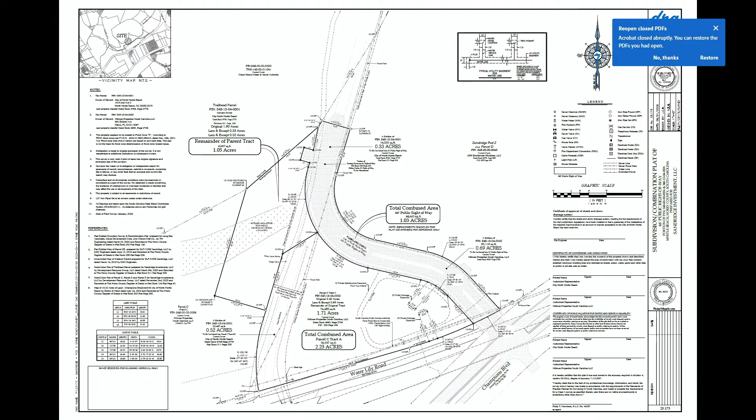Item 5A is SUB 2546, a final plat for the Sandridge Spine Road. The preliminary plat was approved September 19th of 2024. Total area of the subdivision is 3.24 acres, one lot of record zoned R2A currently. This plat creates Parkland Drive, a 66-foot wide public right-of-way designed to meet city standards, including requiring sidewalks and street trees according to the LDRs. There is no financial guarantee with this plat because Public Works has accepted the closeout documentation, the recorded road and drainage record drawings, and everything has been installed. Staff has no issues with the plat.

Is there any discussion by the commissioners? Any comments from the public? Okay, then I'll entertain a motion. Mr. Chairman, I move that the Planning Commission adopt the staff report and approve the major unbonded final plat of subdivision SUB 25-46 prepared for Sandridge Spine Road as submitted. Second. First and second, any final comments? All right, all those in favor? Aye. Opposed? Ayes have it.

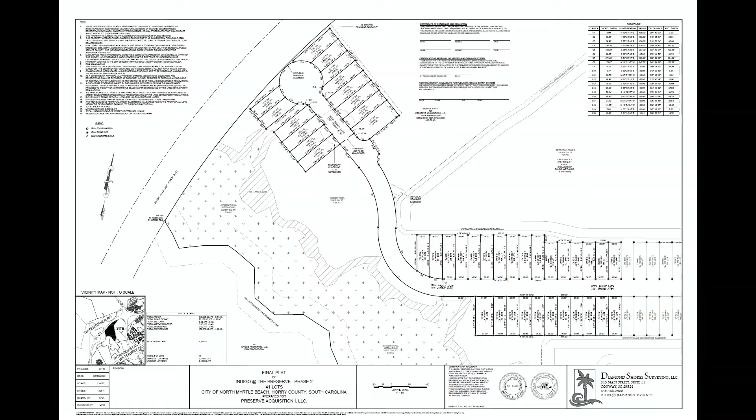Item 5B on the consent agenda, pulled off, SUB 2627, creating 41 residential lots and rights-of-way in Phase 2A of Indigo at the Preserve. This preliminary plat was approved June 18th of 2024. Total area of the subdivision is 5.74 acres, zoned PDD. Infrastructure is currently under construction. The smallest lot is 3,719 square feet and the largest is 7,188, with a density of 7.14. This plat continues Blue Heron Lane, a 50-foot public right-of-way. Everything is according to the approved preliminary plat and PDD, and they are providing a subdivision bond for $332,077 for this plat. There's no comments from staff.

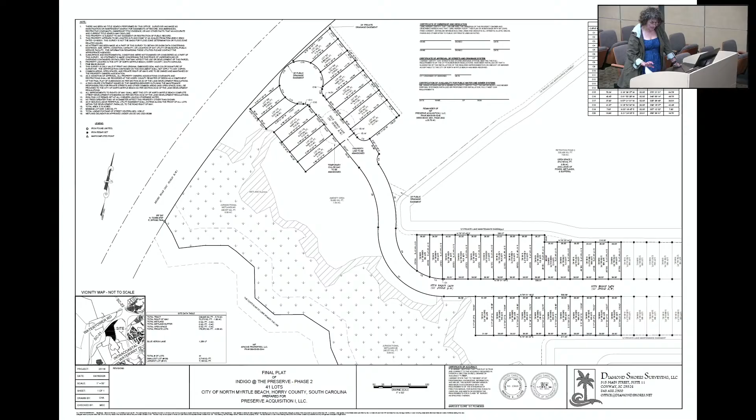Any commissioners have any comments? Any comments from the public? Seeing as there's no comments, I'll entertain a motion. I move that the Planning Commission adopt the staff report and approve major bonded final plat of subdivision SUB 2627 prepared for Phase 2A of Indigo at Preserve as submitted. Second. First and second, any final comments? All right, all those in favor? Aye. Opposed? Ayes have it.

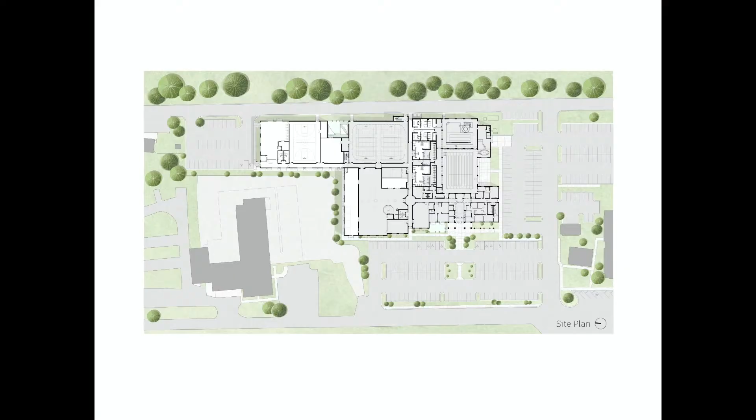Item 6A is Capital Improvement Project Review, CIP 26-2. This is presenting the proposed expansion of the AFC for your review. Pursuant to state law, when we have a comp plan in place, any proposed public facility, street, structure, or utility project must be reviewed to determine its consistency with the comp plan.

This expansion and renovation of the AFC is approximately 31,000 square feet of new construction and renovations, including a 4,000 square foot fitness room with stretching space, an additional aerobics room, expanded and modernized men's and women's locker rooms, new boys and girls locker rooms, and a new gym. This also includes dedicated spaces for youth programs and outdoor fitness activities. In terms of staff comment, there was nothing other than this expansion being consistent with Goal 2.3 of the comp plan, which calls for a system of recreational facilities adequate to support a wide variety of active and passive leisure pursuits, and Strategy 2.3.6, which encourages the development and operation of diverse recreation activities for citizens of all ages, and Goal 2.2 by expanding an existing community facility and improving the city's ability to provide recreational, fitness, and youth programming services to residents.

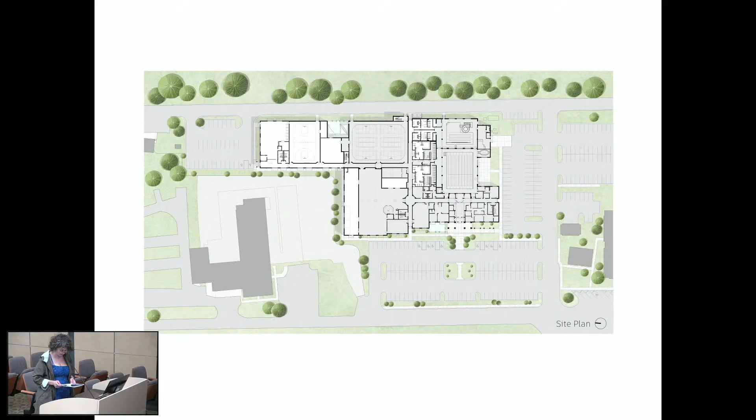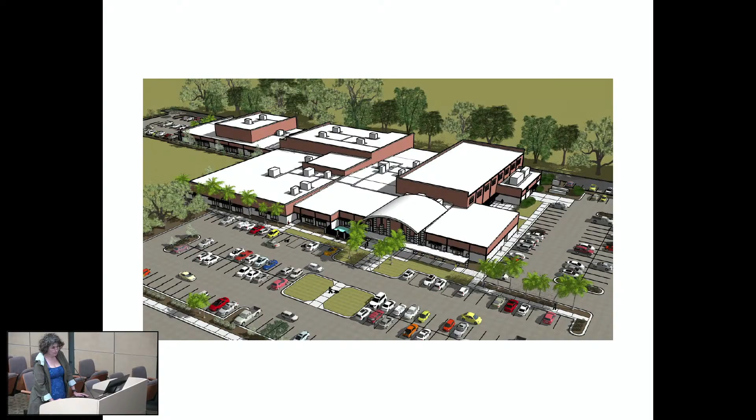You heard staff's presentation. Is there any comments by the commissioners? Anyone from the public here to comment? Okay, no comments from the public. Final on the commissioners, any comments? I'll entertain a motion. I move that the Planning Commission adopt the staff report and find the proposed capital improvement project CIP-26-2 to be consistent with the comprehensive plan as submitted. Second. I have a first and a second. Final chance for comments. Okay, all those in favor? Aye. Opposed? Ayes have it.

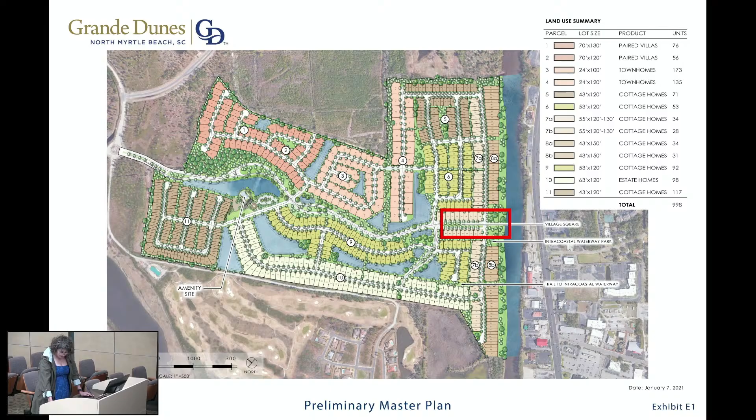Our last item, 6B, minor PDD amendment Z26-12. This creates a waterfront park at the terminus of Grande Dunes North Village Boulevard. This was part of the 2021 amendment that was approved by council. This minor amendment, though, provides a more detailed site design and development plan. We have landscaping in the medians along the road, and then kind of a passive recreational amenity, including a pavilion, walking trails, landscaping, seating area, and drainage improvements.

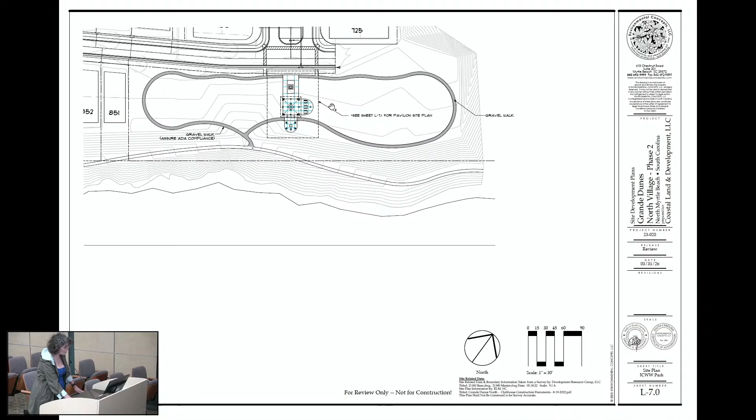There was discussion this morning about where people were going to park, and the engineer has provided an updated site plan with four parallel parking spaces adjacent to the park.

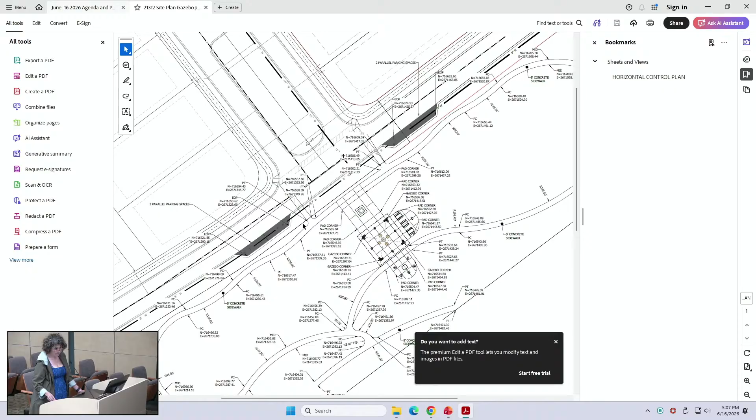I suppose those parking spaces are adequate for the expected clients of the park, being it's a small one. And if it's not, they'll come back for an amendment to add more, I imagine.

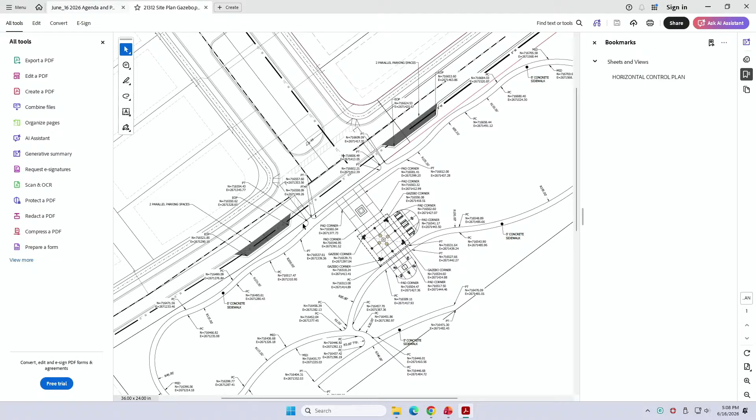What about the last landscape median, kind of like the boat ramp in Cherry Grove? Angle parking? I don't think that would meet the standards for the travel way with the parking and everything. Public Works would have to review that, but I don't think that would work there.

It's not long enough to do angle parking all the way on both sides, just straight through. If you're driving down, pull, angle in, then you'd back out and curve around to go back out. It won't work? They require two lanes when you have that. Oh, gotcha, okay.

These are private streets, correct? That is correct. So any questions or complaints about vehicle parking, golf cart parking, e-bike parking, or any other parking issue would be between the residents and their HOA, and the city would have nothing to do with it, correct?

If they were proposing something, the city would verify that it met our standards and the standards for public roads, because private streets also have to meet those standards. But in terms of need, that would have to be addressed by them. As far as homeowners calling the city saying there's no place to park my golf cart, they'd just be politely told we can't do anything about that—call your HOA. Yes, okay, thank you.

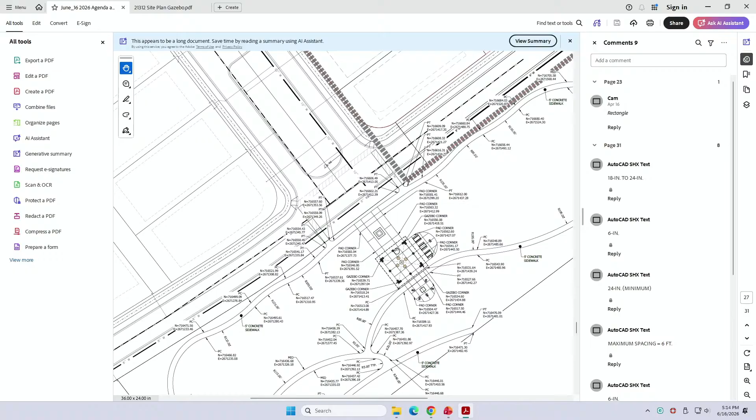Long, about nine feet deep. So if they wanted to reorient the striping, instead of two parallel spaces for a standard car, they could do angled or even almost perpendicular parking for golf carts—usually about ten feet long. But the developer just wants to propose these two areas and accommodate whatever parking's necessary for residents. Four car parks is probably pretty ample for a passive pergola, or gazebo rather.

Any further questions or comments? Just a point of clarification—the five-foot concrete sidewalk on this last plan you just gave us. Yeah, like I mentioned, we're going to revise our plan to match the landscape architect's plan. It was their design intent to do the crush and run, so we'll follow their design intent and change our plans.